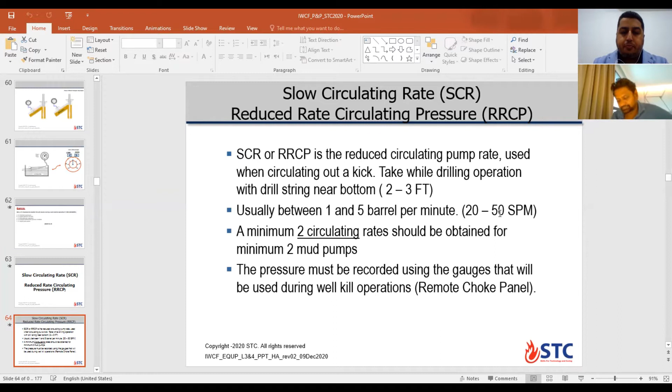When we need to take the SCR: at the beginning of each tour, at crew change, at least once. At any time mud properties change, like weight or viscosity. When the bit nozzle changes, when the bottom hole assembly changes. After any repair to the mud pump. After a killing operation, because it changes the kill mud weight. And at least every 500 feet of fast drilling of new hole.

But nobody does this, right? No, it should be done, but nobody does it. Why? Because if you drill fast, 500 by 500 by 500 feet, your reading at the kick will not be the same as before.

Your reading while drilling at, for example, 5,000 feet, after 500 feet you reach 5,500 but you don't take this reading, only at 5,000. After 6,000 you don't take this reading. At 7,000 you take a kick. Do you think the value you use to calculate the SCR at the kick depth is the same as at 5,000? It will increase because the depth is deeper. You go deeper in drilling, that's why every 500 feet it needs to be updated with a value near the kick situation.

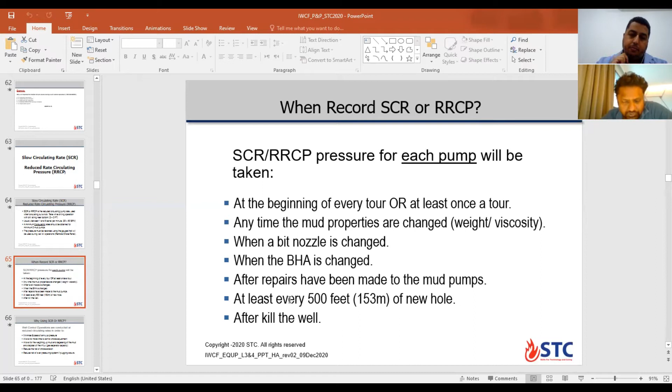Why do we need to take the SCR, or why do we need to kill the well with a slow pump rate? When you're killing the well, you stop, you already shut in the well with the pipe ram. You start to circulate from the choke line, not from the flow line, so you have limitation in the ID of the pipe.

You have limitation in the mud gas separator to vent the gas out. You have one operator or supervisor working at the remote choke to control the pressure of the well. So you need to control the operation at all times, so we need to reduce your pump rate.

First reason: minimize the APL, or excess annulus pressure, which can affect the bottom of the well. Allow more time to control the choke adjustment. Allow time for the crew to weight up the mud to the kill mud weight density. And also, consider the gas separator capacity.

You don't need to overload the mud gas separator, and you reduce the risk of choke erosion—the choke can erode from high pump rate. If you get plugging during killing operation in the choke system, you reduce the risk of overpressuring the system, which can break the weak point. This is the reason to use slow pump rate during killing operation.

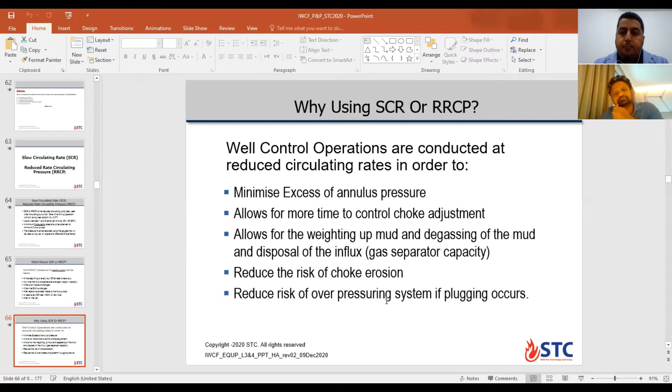Clear? Clear. Okay, after that we'll talk about formation strength test, or in some companies called LOT, leak-off test, or in some companies called FIT, formation integrity test. What do you measure, or what is the objective of this test?

The maximum allowable pressure before you have a leak-off at the bottom of the hole, with the current mud weight in the hole, to get your maximum allowable mud weight in that section. Yes, this is to get the maximum or fracture mud weight.

You can drill the next section of open hole. If you exceed this value, you will have losses at the weak point, which is usually the casing shoe. Correct, so this test is to check the strength of the formation before it starts to break or leak. It will not break first, it will leak only. So the leak-off test is called that because you have a leak—fluid starts going into the formation.

It's not a complete break. The difference between leak-off test and FIT, formation integrity test, is the same procedure, but in leak-off test you perform it in an exploration well, a new area, where you need to know at which point the formation will start to break or leak. But in formation integrity test, you perform it in a development well, a known area, so you go up to some safety margin value from the surface pressure and hold it to confirm the formation is holding this pressure. Okay, this is the difference between leak-off test and formation integrity test.

So when you perform this test, after you set your cement, you start to drill out the float shoe and shoe track. You drill 5, maximum 50 feet of new hole below the shoe. After that, you circulate to homogenize the mud and the well. Then you pull your string back inside the casing before you start the test. Why do you need to pull inside the shoe?

Because you don't want to lose, you don't want to fracture the formation and cause losses with the BHA in the open hole. You might cause differential sticking. So you protect it and bring it back to avoid the stuck. If you leave your bottom hole assembly in open hole for a long time, it can stick and you lose the hole.

Correct. So you pull back to the shoe. You close your string, you close your BOP, and you start line up your pump or cement unit at the kill line. At that time, you start to pump slowly with known mud weight till surface pressure starts to drop. At that moment, you know the formation starts to take fluid inside.

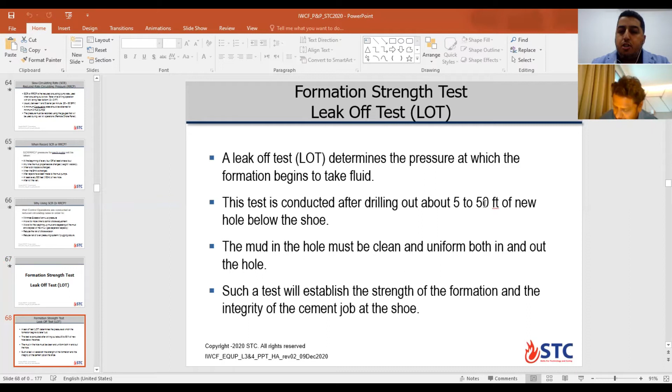Correct. You stop at this point. This point at the surface pressure is called leak off test pressure. When you add this surface pressure plus your hydrostatic head from surface to the shoe, it gives you the fracture pressure for the formation. This is the trend. You plot here pressure by volume. When the pressure here starts to come out from the trend, that means the formation will not support this pressure. It starts to lose. So at this point, you will stop.

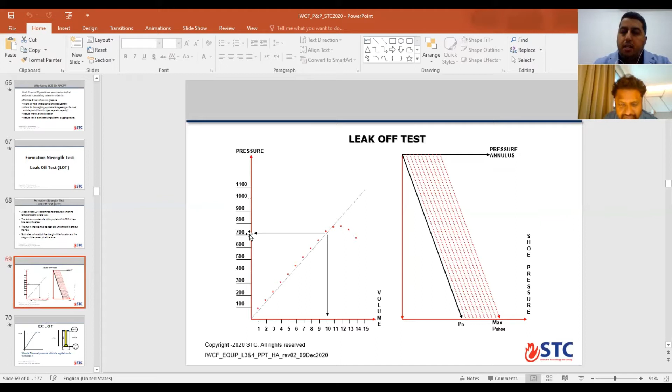For example, this point is 720 psi. When you add 720 psi to hydrostatic pressure in the well, it gives you the maximum pressure at the shoe, or the breakdown of the formation. For example, here, this value at the trend is 720 psi. You have mud weight in the well 9.6 ppg. That shoe is at 3,000 foot.

So when you add, can you calculate the hydrostatic head and add to 720? So 3,000 times 9.6 times 0.052. You get 1498 psi, that is hydrostatic. Hydrostatic is 1498 plus whatever you put on to the cement unit, which is 720. So 1498 plus 720, you get 2218, 2217, 2218 psi.

No, here you need to have a correct number without any fraction for the pressure, and this pressure must be rounded down. This is fracture pressure. For 9.6 ppg, times 0.052 times 3,000, you get 1497 plus 720.

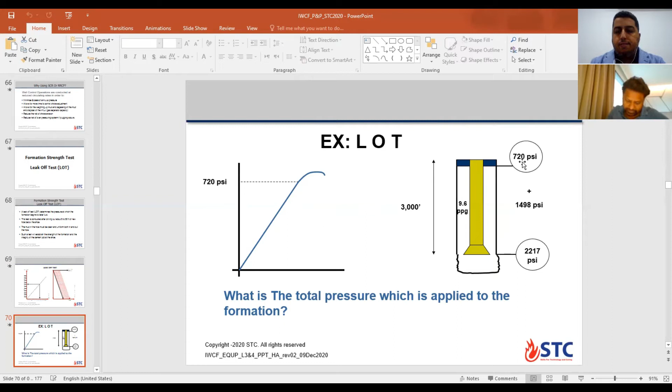So it's 2217 divided by 0.052 times by 3,000 plus our original mud weight 9.6. So we get... 2217 divided by 0.052 times by 3,000 plus 9. Wow, that's high. Really? Yeah, this is calculation, for example.

2217 divided by 3,000 times 0.052. Yes, 14.2. 14.2 here, you calculate here maximum allowable drilling fluid density, or fracture. This must be rounded down, only one decimal after the point mark here.

Correct. So there is two ways, Mr. Hani. You can take the cement unit pressure first, right? And do that plus 9.6, right? Or you can take the total one, and correct. Okay, the same. Agree. Okay. Yes.

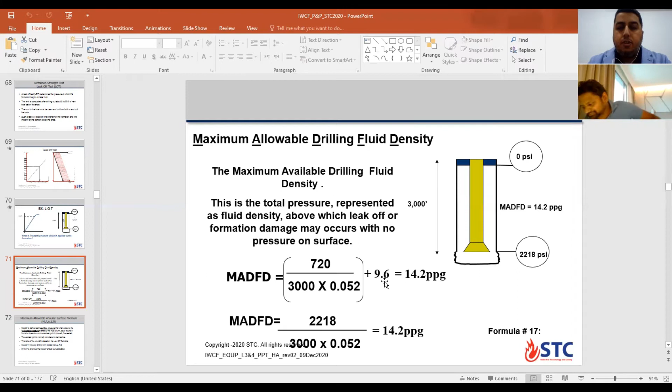From here, leak off test pressure, usually this is the maximum surface pressure, right? At the outlet. You can see when you add it to hydrostatic head, you will break the weak point. It's the shoe point, right? Okay, what parameters can affect the value for the fracture pressure?

What can affect it? Ununiform mud weight, one. The mud weight from the equation can affect. Okay, mud weight, what else? The mud weight, the formation pressure itself. No, the formation pressure is not factored in, it's not part of the thing. So what else can it be? The correct depth for the shoe TVD, it will affect your value.

Homogeneous mud weight in the well first. Correct. Second, TVD for the shoe, correct depth for the shoe. You mean if they place the shoe at the wrong depth? Yeah, it will affect your value for the fracture or the maximum mud weight. Yes, correct. And also if casing is short, and calibrated pressure gauge at the surface to read correct surface pressure to calculate your maximum mud weight. Right, these are the three parameters that can give you an incorrect value for your maximum allowable mud weight.

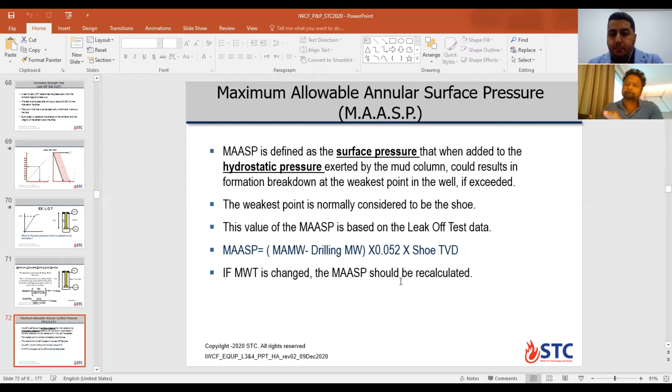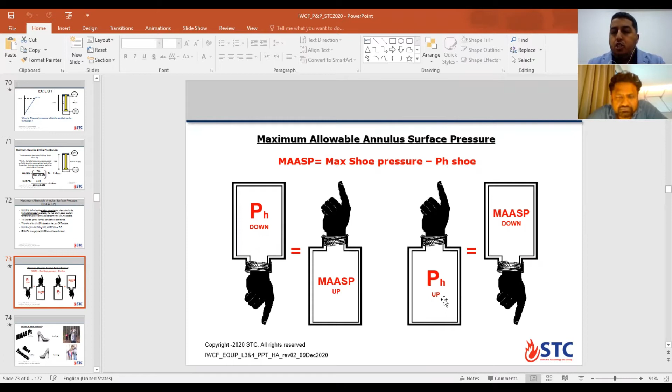Correct. Here, if you look at it another way, MAASP equals maximum shoe pressure: the fracture pressure minus hydrostatic pressure at the shoe. If the hydrostatic, I mean the mud weight parameter, goes down, the mass will go up. If the mud weight increases, the mass will go down.

And mass also, when you round it, it will be rounded down, like the fracture pressure, like the LOT, leak off test. Why? Because this is a maximum value. If I exceed it, I will break. I need to stay away from this value, away from the maximum.

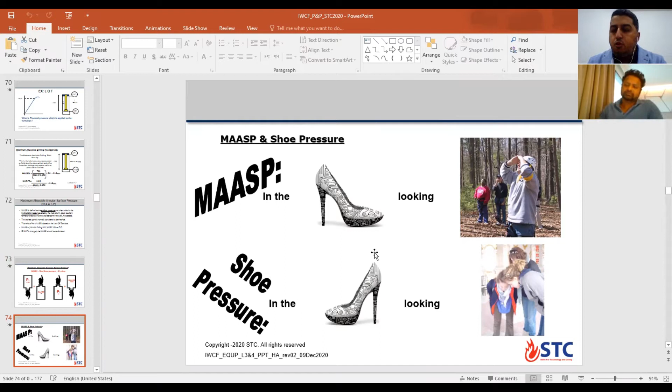What parameters can increase the risk of exceeding MAASP? Depth, unexpected high pressure, kick size.

If you take more kick volume, that means more height, more reduction in hydrostatic head, so the casing pressure increases more. So the margin between the casing pressure and mass will be less. Low fracture pressure formation.

Long open hole section means you need to circulate a long distance from bottom to the choke to control your casing pressure away from the mass. If you have gas migration in a closed well, all pressure will increase.

Bad practice during killing operation: you put too much safety margin during the killing operation, and you end up near the mass.

Ignoring choke line friction, this is for subsea. Usually in surface BOP, we ignore the choke line friction because it's short length. But in a subsea rig, it will be from seabed up to surface, seabed to top surface. Correct, these are the parameters that can increase the risk of exceeding the MAASP.

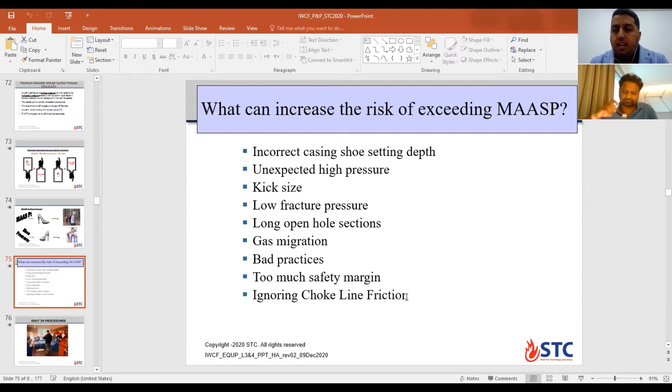Now we take a kick, so we have positive indicators and we start to shut in the well. This is the procedure now. We transfer from principle to procedure for shut in. What should the driller do? The driller is responsible to indicate the kick and react fast to shut in the well without any delay, without waiting for permission.

What is the type or procedure for shut in? Do you know about the hard shut in procedure and soft shut in? I've read about it, but I'm not too sure. Okay, hard shut in is all about timing, right?

Yeah, you have two types for shut in. Most companies deal with hard shut in or soft shut in. This is a decision for the client.

The client policy said that you need hard shut-in procedure, so the rig will follow this instruction. Okay, for the line up during any operation.

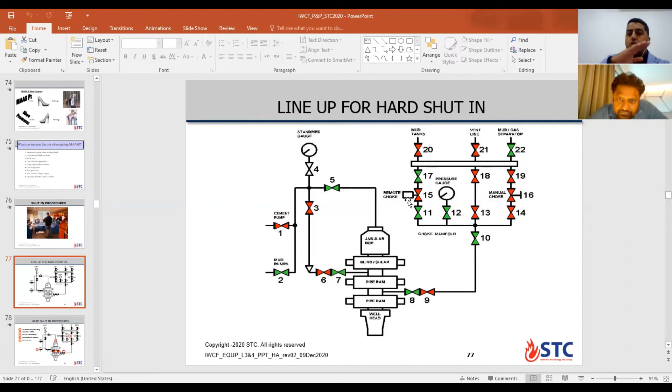But now we are drilling and we have the hard shut-in procedure. What should I do if I take a kick during drilling operation? I'm drilling on bottom, there's an increase in flow rate coming in the flow line, so I stop pumping and need to shut in the well following the hard shut-in procedure.

What you should do first, you pick up off bottom and position the string. You have the tool joint above your rig floor, so you can see where to close the BOP. You space out to avoid closing across the tool joint.

Second point in sequence, you stop pump and rotation. Third, it is hard, so you start to close immediately the BOP, whatever ram or annular, it's up to you. There is sudden impact now on the formation. This one is closed and the BOP is closed.

After that, you open number 9, the hydraulic side outlet valve. So the flow or pressure will come from this side, hit the closed remote choke, and you start to read shut-in casing pressure - the annulus pressure.

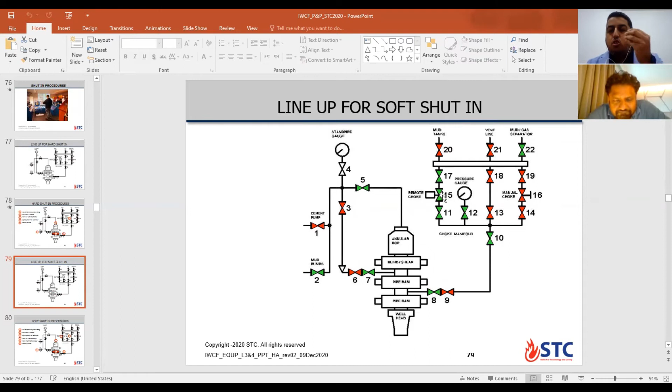So what is the procedure if I need to close while drilling the well if I get kicked? First, the same pickup and position string space out. Stop pump and rotation.

Third thing, I will not close the BOP. I will give pass for the flow. I will open the HCR. So the flow coming from the BOP and coming from the choke line. After that, I will close the BOP.

Number 4, still have influx or flow coming through the open remote choke. After that, finally, I will start to close remote hydraulic choke and I recorded the casing pressure.

Understood. So you leave time for the fluid to flow out first to reduce the bottom hole pressure, and then the final one is the remote choke. So you're not banging the bottom of the formation, right? That's the point, right? Yeah.

This method is suitable with the soft formation or weak formation, or weak shoe, yeah. That's why in the same country you can find one field use soft and another field use hard. This is the client decision.

Understood, Mr. Hari. Which method gives you less volume for the kick? The first one, hard shut-in, because from beginning you shut in all the way. Yeah, correct. The increase in the tank will be at the time you notice the kick, before you shut in the well. But here you give pass, so you will take a lot of kick volume with the soft shut-in procedure.

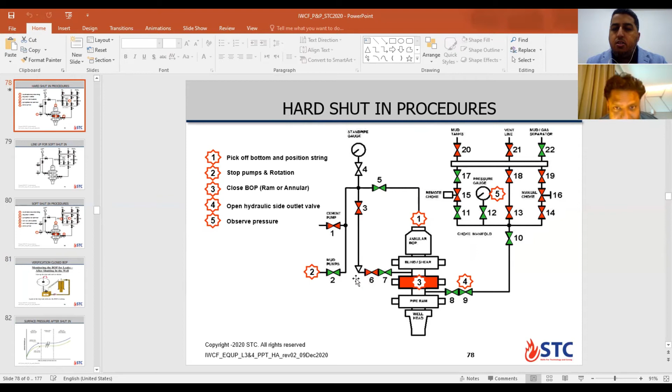And this is again, look at soft shut-in - same. The first two steps are the same.

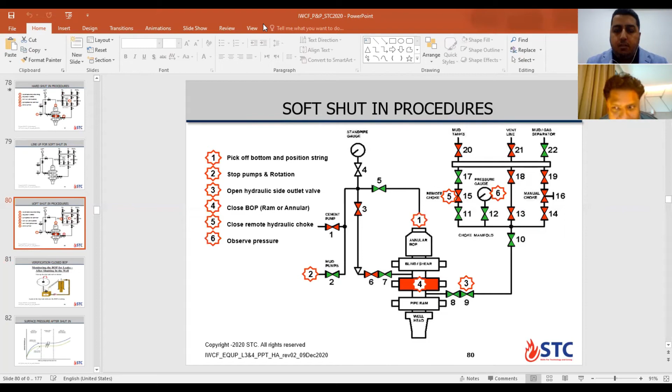Here, our presentation - last point we stopped at, after we shut in the well and verified that the closed BOP has no leak.

So now we go to record our shut-in drill pipe pressure and shut-in casing pressure. The pressure gauge will start to increase until stabilization happens to the bottom hole pressure, which will then equal our formation pressure.

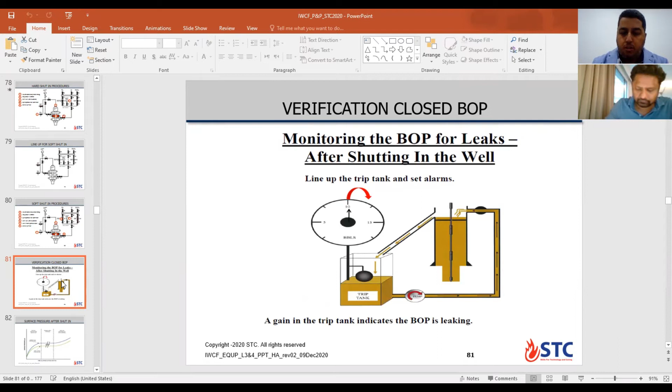In this case, we start to take our reading every 2 minutes, recording time versus shut-in drill pipe pressure and shut-in casing pressure.

Usually, when the influx comes inside the wellbore, it enters the annulus area and will not affect inside the drill pipe. Why? Because you have a float valve in the string.

And if you don't have a float valve, the nozzle for the bit will also not allow the kick to come inside the drill string. So the drill string will have homogeneous fluid, the drilling mud.

After some time, while you are working on the kill sheet and calculation, you will start to see all pressures in the well increase by the same amount, delta P, for the pressure increasing.

This is due to the influx being gas, and the gas starts to migrate due to its density, the different density between the gas and the drilling fluid inside the annulus.

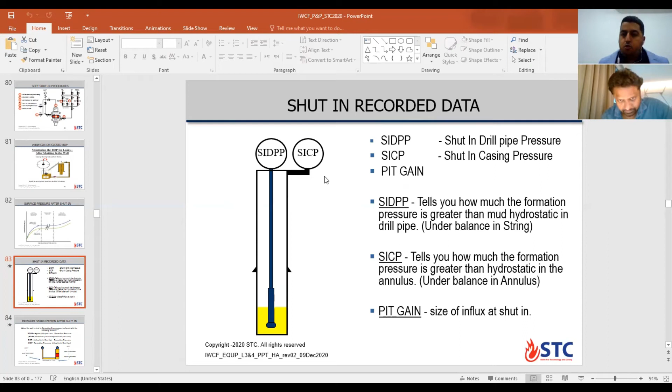So it means the kick is already inside the casing, affecting the casing pressure only. That's why we tell you from the beginning, if you shut in the well in small volume for kick without any delay, you will get less shut-in surface casing pressure, so you have a range away from the max value, and your killing operation will be more easy.

Okay, let's look here. This is the drill string area part, and this is the annulus area. When the well is shut in, formation pressure will be equal to bottom hole pressure from both sides. From the drill string side, formation pressure will equal shut-in drill pipe pressure plus hydrostatic pressure of mud inside the pipe. Shut-in casing pressure on the other side, plus hydrostatic for influx plus mud hydrostatic, will also equal formation pressure.

So which side is best to calculate your formation pressure? It will be the drill pipe string side, because it's clean fluid. So you get the surface pressure, you get the hydrostatic head, you calculate your formation pressure. After that, you can move to the other side — your formation pressure is known, so you can know the gradient or the type of influx inside the wellbore.

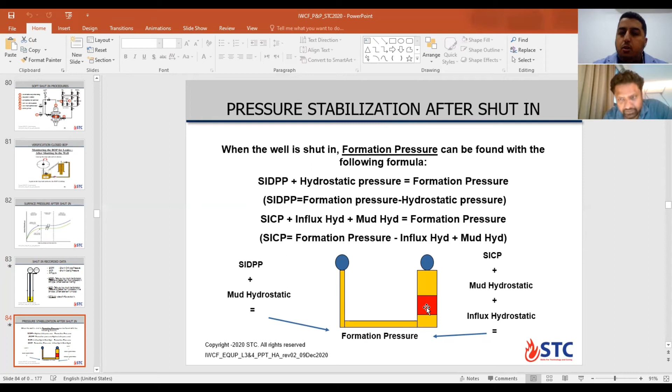Why is shut-in casing pressure higher than shut-in drill pipe pressure? Because hydrostatic pressure or hydrostatic head in the annulus is affected by the influx.

What can happen if we have a float valve in the string? What will you read at the surface? If you have a float valve in the string and you have a kick, you will read only shut-in casing pressure. The shut-in drill pipe pressure will be equal to zero, because when you shut down the pump, the float will close. So how can we record shut-in drill pipe pressure in this case?

Can you use the pressure before you shut down? No, you cannot. You can use slow circulation rate — you will open the float valve to read the pressure. So you use the pump for sure.

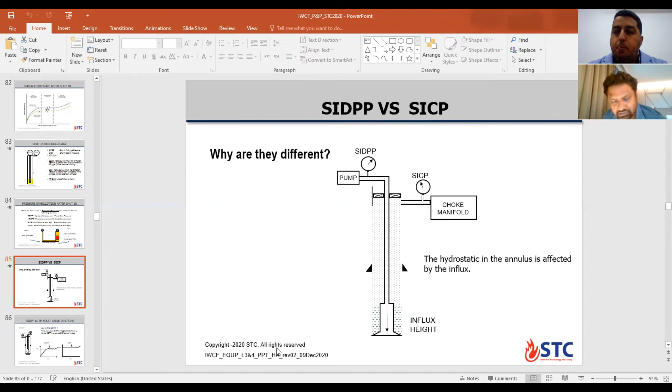How can we know, how can we find shut-in drill pipe pressure here? You have casing pressure value 600 psi and shut-in drill pipe pressure 0, and you have a float valve, so 0 shut-in drill pipe pressure. You will start your pump slowly, only 5 SPM, like half a barrel.

And you look at the shut-in casing pressure value. When you see the shut-in casing pressure start to increase, that means there is communication and the float valve is open. At this moment, you shut down your pump, and you read the trapped pressure inside the drill string, which is the shut-in drill pipe pressure value.

So here: pump slowly down the drill pipe at 5 SPM and watch for build-up in the annulus. Record shut-in drill pipe pressure as soon as shut-in casing pressure starts to increase.

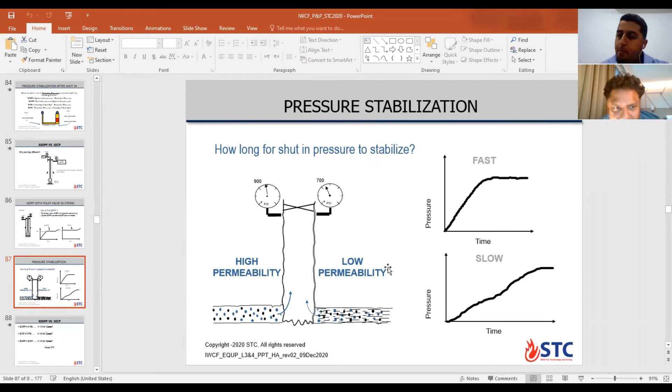Let's think together about these conditions. First case: you have reading for shut-in casing pressure, and your shut-in drill pipe pressure equals zero. In which case? Your float is closed. You have a float valve in the string. What else?

Casing there is pressure, but drill pipe there is no pressure, zero. Is it? Okay, so casing has a reading, no problem. One is float valve is closed. Number two?

If your nozzles are plugged, maybe. Nozzle is plugged completely, possible. You can have zero psi on the SIDPP. Yeah, but this is difficult, which one? Gauge. No, it can be plugged. It can be float valve not open. Gauge problem, gauge not working. Yes, and gauge problem and nozzle plug. Nozzle plug maybe not easy, but gauge not working, yes, possible. You have a blockage in the drill string, like this block.

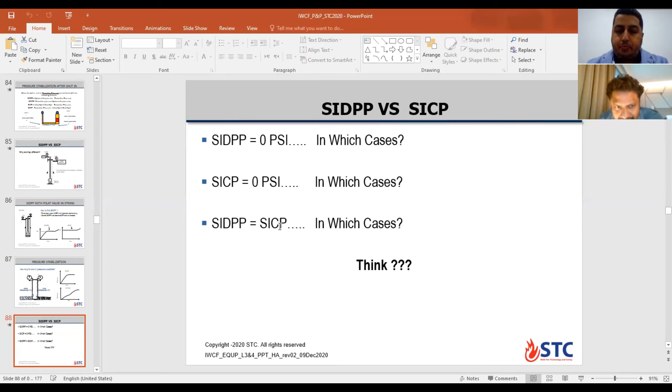Sorry, Ms. Hani, again? Yeah, sorry, the communication is down I think. Yeah, again, I will share the presentation. You can see the presentation now, right?

In which case will you get higher shut-in casing pressure? In the first case or the second case with the annulus loaded? Was the annulus loaded? Sorry, in the first case, you will get higher casing pressure than in the second case - in the clean annulus you get higher casing pressure. Why? Because the cutting loading will make the hydrostatic head higher, so the casing pressure will drop, so the summation will be equal to a constant bottom hole pressure or formation pressure. This is the difference. The drill pipe pressure will have no change here because this is the difference between formation pressure and hydrostatic head, which is not changing.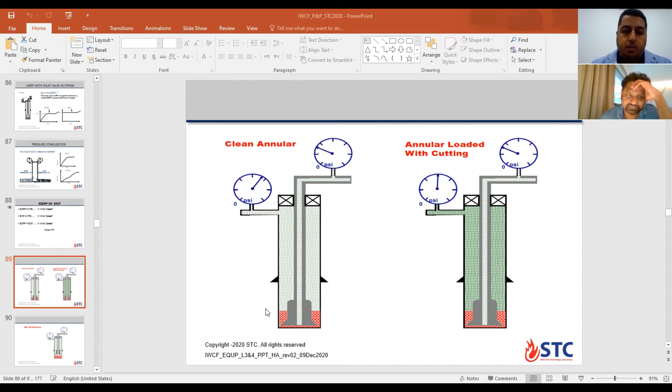This is off bottom - the case where shut-in casing pressure equals shut-in drill pipe pressure. Your influx is below the bit, so at the circulation point, hydrostatic head in the annulus equals that in the drill string, so both are equal. Once you start stripping back to bottom to clean the well, after the bottom hole assembly passes around the influx, the casing pressure starts to increase to its normal value when you are on bottom.

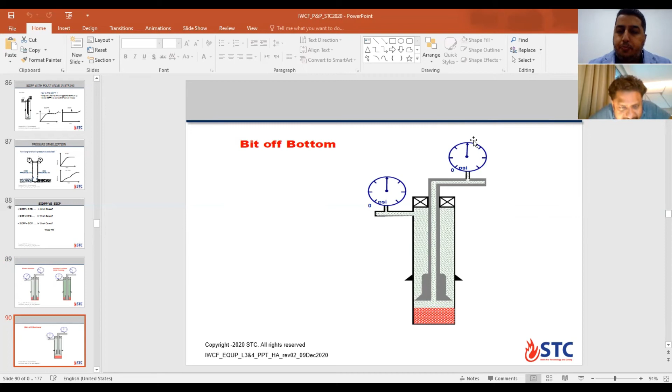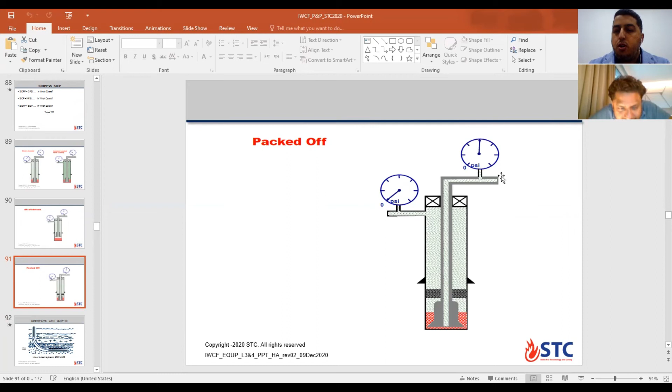Here, the pack-off. If you have a pack-off around the bottom hole assembly and the influx is below, there is no flow at the annulus, so it reads zero, and the shut-in drill pipe pressure has a reading. Here, what about this one?

Shut-in horizontal well - no vertical hydrostatic head for the influx, so both will be equal from the beginning until the influx starts coming into the deviated and vertical section. Then you will see an increase in shut-in casing pressure.

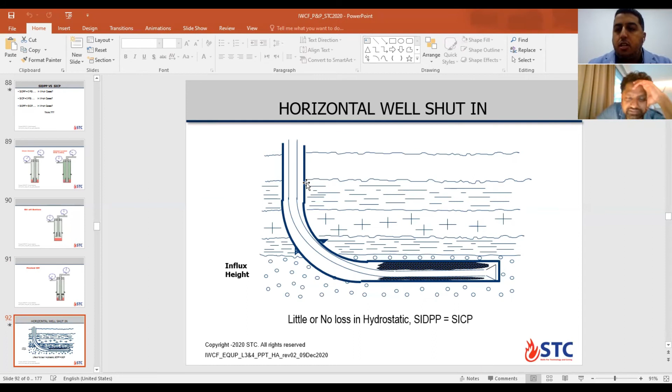Now we'll talk about gas behavior. The gas behaves differently than liquid, oil, or water. That's why it is the worst-case scenario for a kick during the killing operation. You have two behaviors for the gas.

The first one is called gas migration - it comes from 'migrate', meaning this happens in a closed well, a closed system. The well is not open from the choke, so the gas starts to migrate inside the well with its pressure. What is the pressure for the gas bubble at that time at the bottom? 5,500 psi - it will be equal to the formation pressure it's coming from.

So imagine the effect of gas migration if we don't take action: the gas starts to migrate with its bubble pressure, so the formation pressure will start coming inside the wellbore. That means you will break the weak point, or the casing shoe, at a quick time if you don't take any action. This is gas migration - gas is lighter than the mud and will try to migrate up the hole.

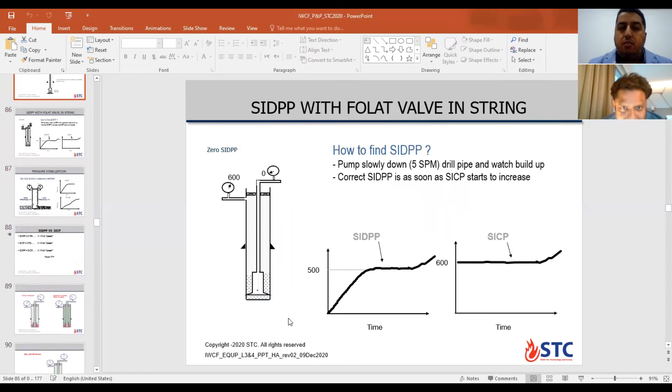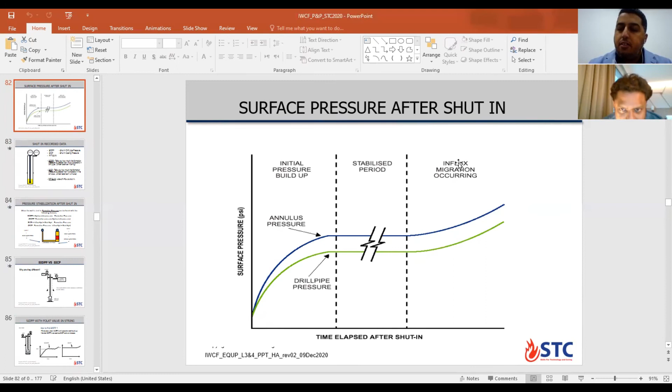If you go back to this slide, we said all points will start to jump up with the same amount, at the same rate, because gas starts to migrate.

Here the gas has reached the surface, so bubble pressure coming to the surface was 5,500. So surface pressure will be equal to this, the maximum pressure reading, 5,500. And bottom hole pressure will be equal to 5,500 plus 5,000 hydrostatic, equals 10,500 psi.

So how much increase in bottom hole pressure from the original 5,500 psi? It is increased 2 times the bottom hole pressure, right? And surface pressure? 10 times.

You imagine the risk for gas migration now? This is the problem with gas migration, because the gas with its pressure will rise up inside the well.

Okay, the speed for gas migration will be based on what? Based on mud properties, weight and viscosity, and hole angle inclination. If you have a high angle well, the gas migration will be slow. In a vertical well, it will be fast.

And the rule of thumb, gas migration maximum according to experience ranges from 500 feet per hour minimum up to 1,000 feet per hour maximum. It depends on hole angle and mud properties.

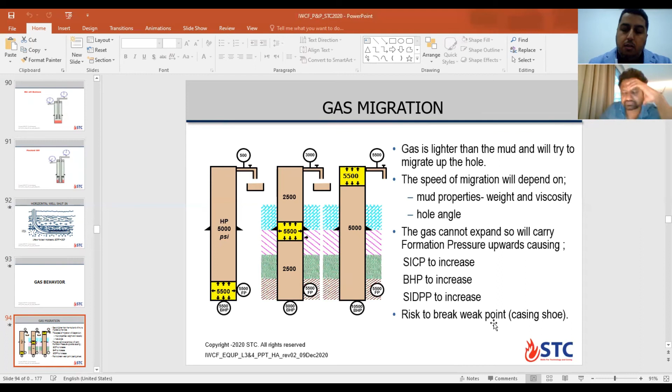Here, gas migration, how to deal with. We need to bleed some pressure from the surface while keeping bottom hole pressure constant to not take additional influx. We bleed some mud to give space for the gas to expand.

Expanding gas is better than migration for the gas, because pressure will be less in the bubble and the volume will increase. So in this way, we control the gas migration, instead of it coming out inside the well without any control.

So here, if you look, drill pipe pressure is 500, and it increased to 600 due to gas migration. So we bleed some mud, and while bleeding the mud, we keep shut-in drill pipe pressure constant.

Why keep it constant? To keep bottom hole pressure constant, because this is the homogeneous phase, and we usually keep the homogeneous side static. Because the casing pressure will jump up, due to more expansion, more reduction in hydrostatic. To compensate this reduction, casing pressure will increase, so the summation will be a constant number equal to bottom hole pressure.

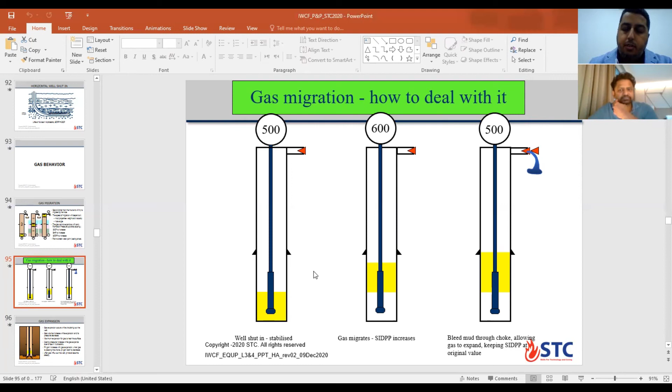The other behavior is called gas expansion. Here we open the well, manipulating the choke, open and close, during killing operation. So instead of the gas migrating in a closed system, the gas starts to expand, its bubble pressure decreases, its volume increases, so the gas starts to expand.

Where is the maximum expansion for the gas at the surface during killing operation? At the surface. So this is the maximum casing pressure you can see at that choke, because of maximum reduction in hydrostatic head, and to control bottom hole pressure above formation pressure, so the summation will be the same.

So when your hydrostatic head becomes less, you close the choke more to increase surface pressure. So the summation of surface pressure plus hydrostatic equals bottom hole pressure, at least equal to formation pressure, to prevent excess influx coming inside the wellbore. This is the target or objective for the well control method. Getting gas or influx out without getting additional influx inside the wellbore. How to control it? By hydrostatic head and surface pressure, both equal to bottom hole pressure.

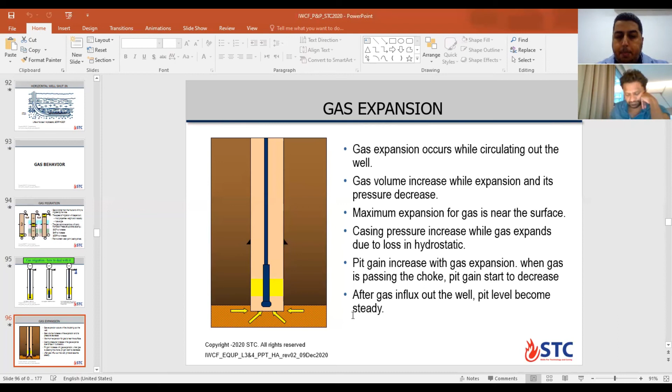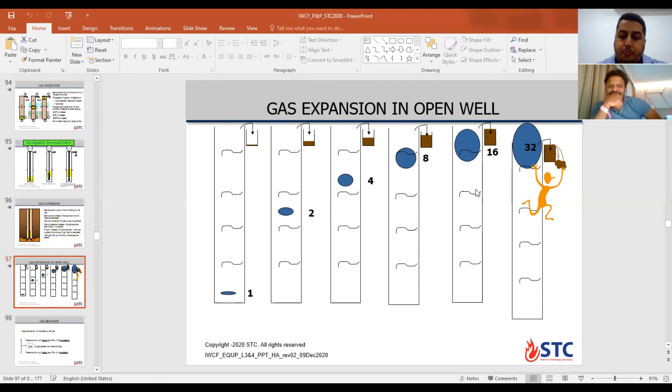When the gas starts to expand, any pressure point above the gas will start to increase. As the gas expands, casing pressure at the surface starts to increase, reaching maximum when the gas reaches the choke or surface. At any point the gas has passed, the pressure becomes constant. Any point below the gas remains constant. At any point the gas is passing, the pressure starts to drop.

Let's take the example of the casing shoe. When is the shoe pressure at its maximum value during a killing operation? Shoe pressure will be highest when the gas is at the surface. No wait, at the shoe point, not the casing pressure.

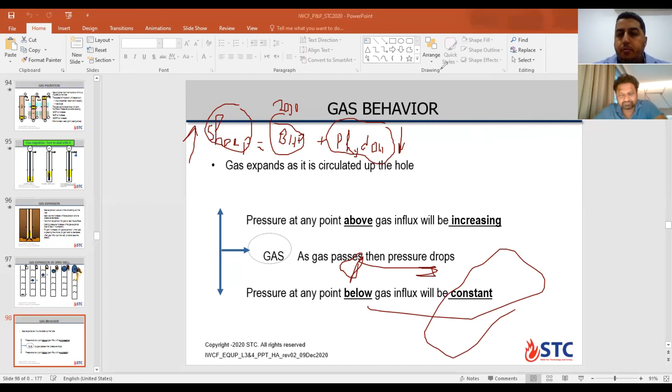So again, pressure at any point above, after the gas is coming inside the shoe and up inside the casing, what will happen to the casing pressure? It starts increasing because the gas starts continuing to expand, so pressure at any point above the gas will be increasing. Past that, pressure will start to drop. Past that, it will be constant. Clear? Clear. Okay.

Here, what is the maximum shoe pressure? We said with gas, it will be in two situations: at the initial shut-in, and when the top of the gas or influx reaches the casing shoe, which is the maximum expansion in open hole. With oil or water, at initial shut-in, and when the pressure changes due to annular size changing, meaning the influx comes into a narrow area, so hydrostatic head increases, so the casing pressure starts to fluctuate according to the change in the hydrostatic head. This is the only change you can see when you circulate oil or water out. It will be more easy because there's no expansion.

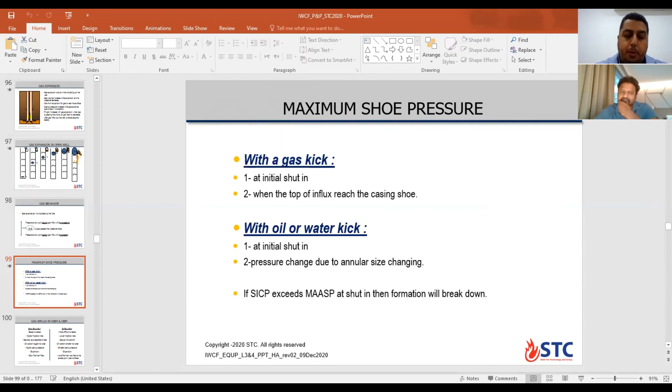If shut-in casing pressure exceeds the MAASP at initial shut-in, the formation will break down at the shoe. What is the behavior for gas in water-based and oil-based mud? If you take 10 barrels of influx in each case, which pressure for shut-in casing pressure will be higher, in oil-based or water-based? Water-based mud, because from the beginning the 10 barrels will be separate, not dissolved, as in the oil-based mud where it will be inside the solution. So this is the second point: it will make detection of the kick more difficult if you are drilling with oil-based mud.

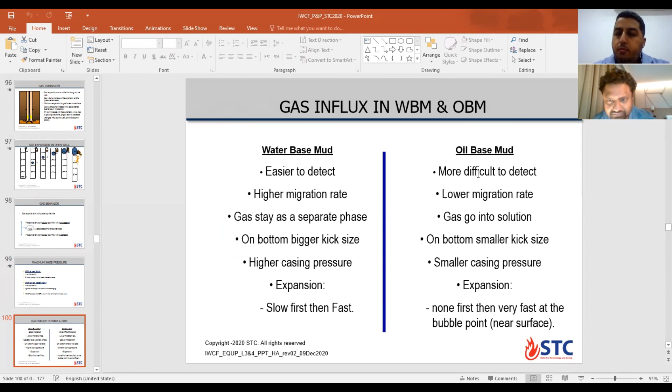Look at this figure. The left one is water-based mud. We'll start at 10,000. At 5,000, 6 barrels gas expansion. Here we take 3 barrels. Then the expansion starts in a constant way till it reaches the surface. Here, zero expansion till about 1,500. Then 100% expansion after you reach the bubble point. This is the danger with oil-based mud.

That's why from the beginning we deal with any type of influx as a gas kick, worst case scenario, because you may be working with oil-based mud and you cannot see the expansion, or the shut-in casing pressure will be affected from the beginning. Correct.

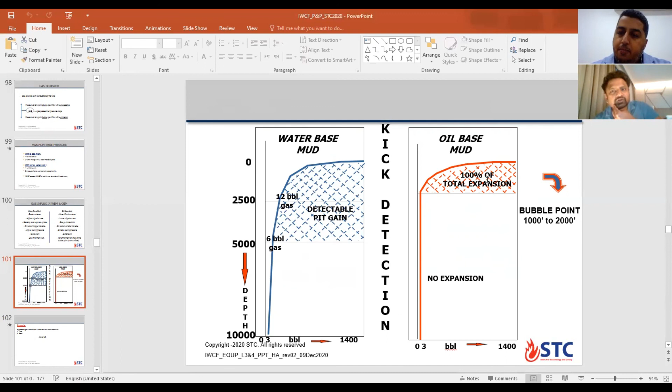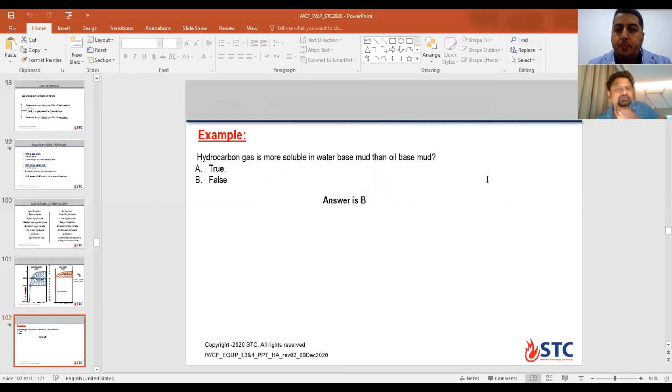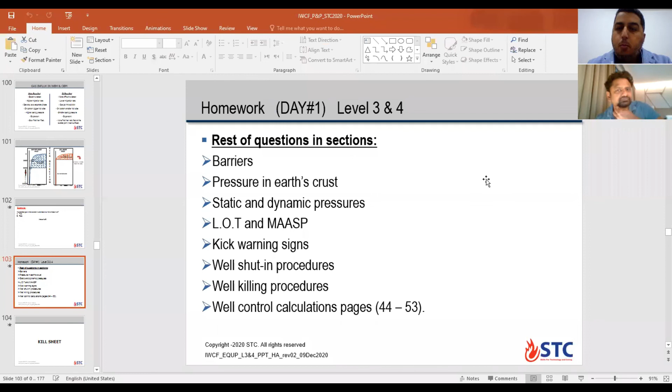Do you have any question on this point? No. Okay, we finished day number 1, actually. This is your homework, the rest of the questions in this section.